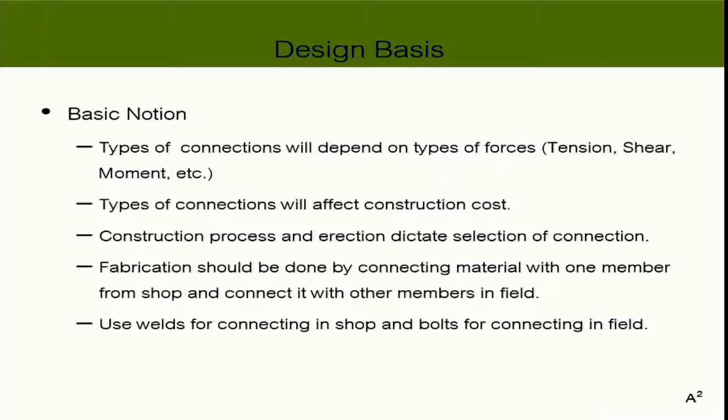The general idea is that you should always try to weld the piece of metal together in the fabrication shop alone, because that's where it is most safe, and you can control the quality. And in the field, you should only try to use bolts so that the erection process can go very quickly and safely.

But I have found this out: in construction in Thailand, if it is a small job, generally the contractor will not have the fabrication shop. Only the big companies will have that.

So the big companies can lay out a very good plan for fabrication. They could just prepare everything in their own yard, and then bring everything to the field and just connect it just like that. I have a good connection with a company down the road — you know that NL company.

It's a very good company, and they have their own fabrication shop, and they love the bolts very much because it makes everything fast, and they don't have to worry about the quality of the welding on site at all. But if the contractors are small companies, it's very hard for them to fabricate the piece of a structure and then have them shipped to the site.

I remember a few years ago, I did a small job for my friend, and I specifically said, okay, you need to weld this and this and this first, and then you just raise them up and bolt it together. One day I visited my friend's place, and I was shocked because the contractor would just bolt everything on the ground and lift everything and weld it in the air, just like that. From that day I understood they did not have the way to measure and prepare the members to very good detail.

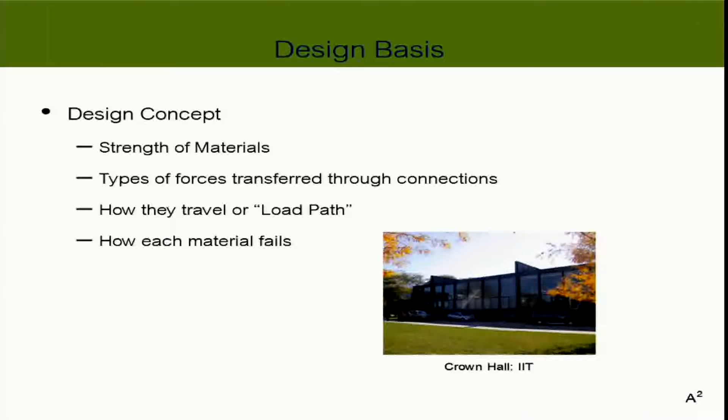He was the one who coined the phrase 'less is more,' I think. But that doesn't apply to everything, right? Because if we have less money, we don't have more money. So it's sort of a minimalist approach.

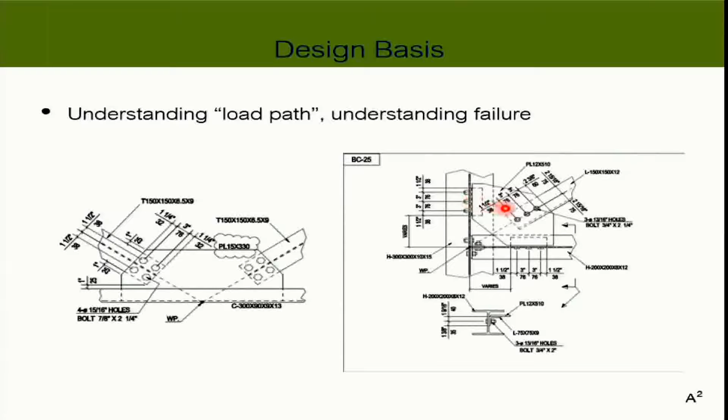This is pretty much the same idea of how the force is transferred, but when it arrives here, it's just going to go partially this side and partially that side, that's all. Okay, that is more of the same.

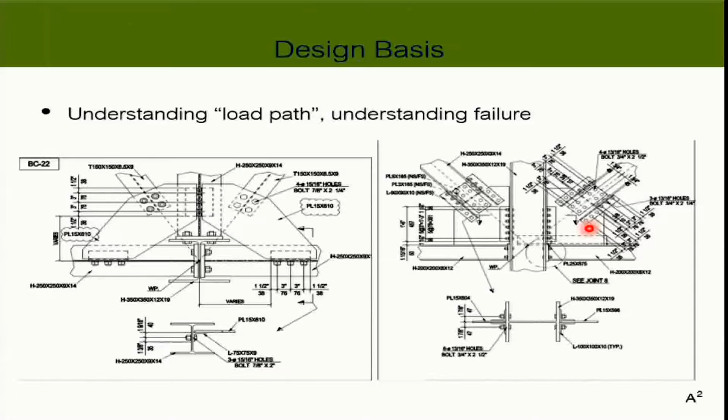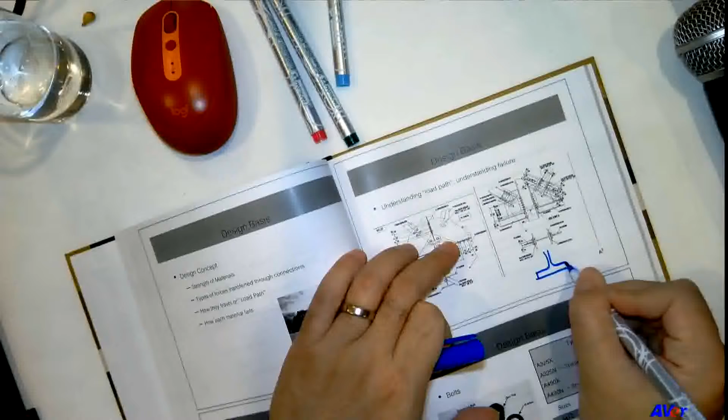So if it's gonna be too small, right? But anyway, let's try. Let's say this is the flange of our H—when you have the angle, it's gonna come like this, right? Oh, looks bigger.

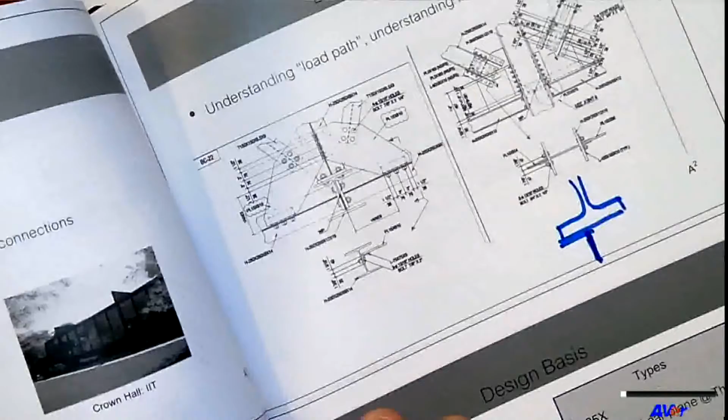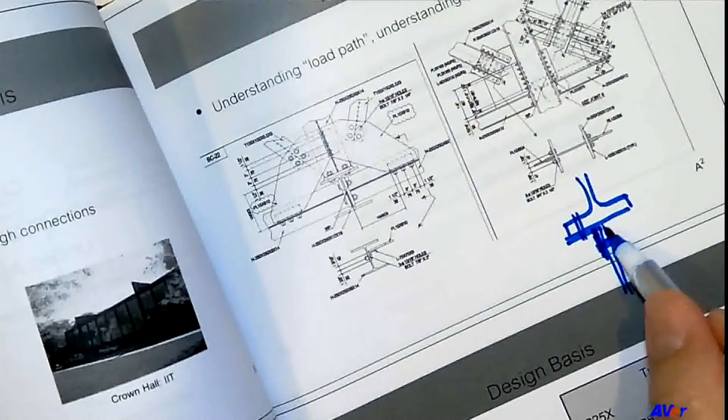So you can bolt the angle to the flange like this, and then the gusset plate is going to be here. So then you can bolt it on another side, and then you have another angle coming in here with the bolts. So we have two times the bolt on this side, but this bolt will have what we call double shear, so the capacity is pretty much the same. Well, I think this is beautiful.

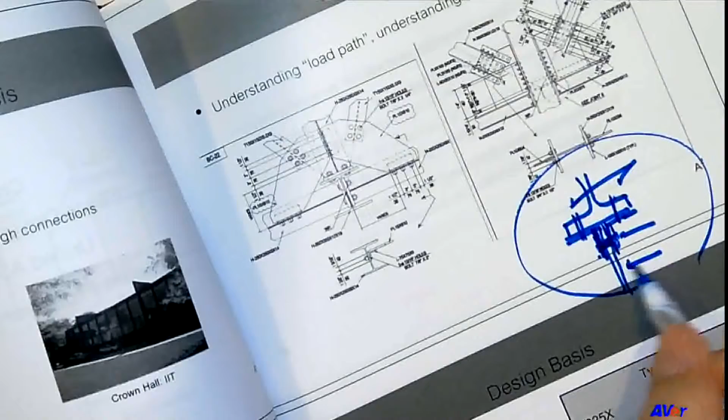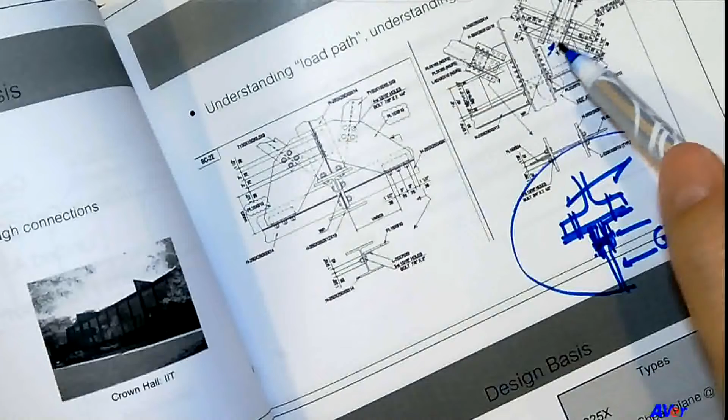This is how we utilize the angle. So this is the gusset, and they call this star bracing. If it's not enough, we can also add a plate here to help transfer the force from the web of the H shape as well. And remember, this H shape now we connect through both the flanges and the web, so the member itself will not have the problem with shear lag. So this is the perfect example.

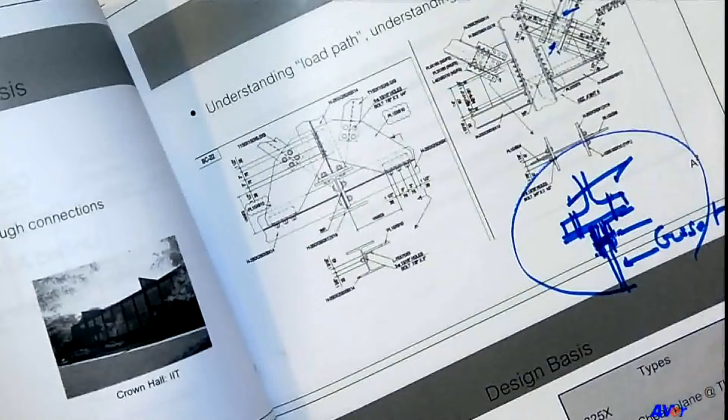If I don't have the plate at the web like this, we're gonna have to check the shear lag of this member, but for this detail, we don't have to. Okay, I think it's a bit too small, so I may stick to the piece of paper. So let's just come back to our academic side of things.

Now let's get to know the first material that we use to connect the steel members together. First is the bolt, of course, and generally there are more than two types. I think there's a third one available now, stronger than A490, but generally it's been used so far with two types, A325 and A490. The number indicates the strength associated with the bolt itself, so A490 is a bit stronger than A325.

There's a letter denoted at the back to indicate where the shear plane is, because the bolt has a thread. If the failure area is within the thread, that portion has smaller area - we lose something when we create the thread. So for the bolt under shear, if we shear off the bolt at the shank, the shank has more area than the thread. If the shear plane is at the shank, we get more shear strength from the bolt. But if the shear plane happens to be at the thread, we get less strength because of less area.

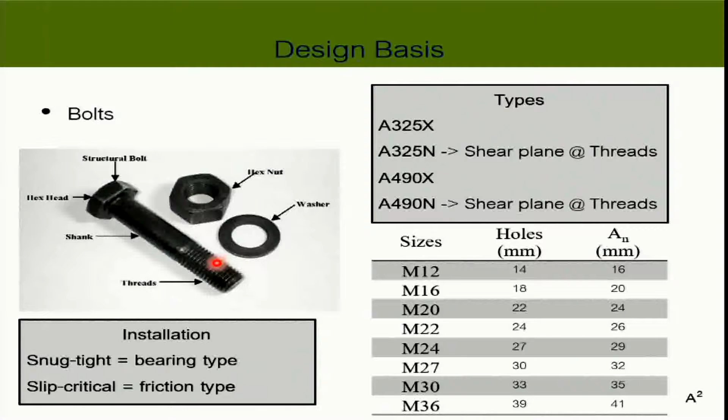We denote that at the end of the number using X and N. X stands for excluded - the thread is excluded from the shear plane, meaning the shear plane is at the shank, which is stronger. N stands for thread included, meaning the shear plane is somewhere at the thread. The N type would be weaker than the X type because the shear plane is at the thread, with less area.

Now the question is, can we actually locate where the thread of the bolt will be under construction? The answer is yes. If we check, we can acquire the dimension of the bolt before installation - how long the shank is, how long the thread is, and how thick our materials are, including all the plates, flanges and webs. If we really want to know, we can. But if we don't want to know, or cannot obtain information about other dimensions, I suggest going with the N type because it's safer. It's conservative, but it's the only option if we don't know where the thread actually is.

The next thing we should know is the size of the bolt itself. Generally this is in metric form, so the common types used in the market would be from M20 to M24. You can use smaller or bigger than that - I believe we have bolts bigger than M36. But if you're going to use an unusual bolt size, keep in mind you may need to order it from abroad, as it may be unavailable in the market.

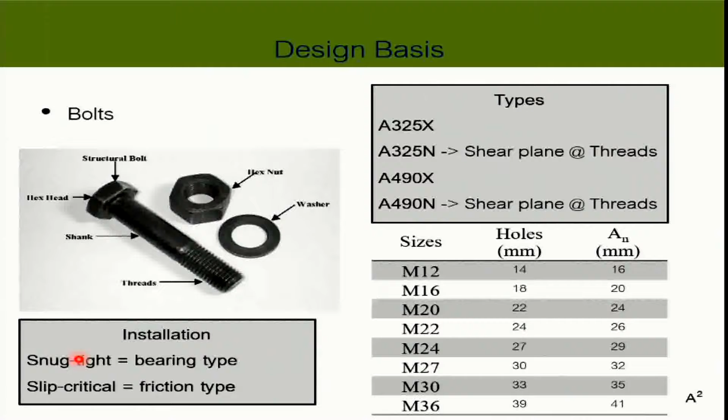So that's a typical one, and if we use that one, the force transfer mechanism involved is the bearing force. Remember bearing failure yesterday? If we install the bolt using snug tight, the force transfer will be via the mechanism of pressure between the bolt and the plate.

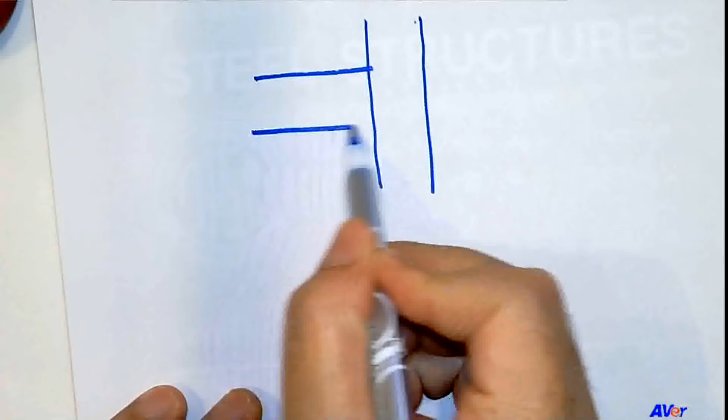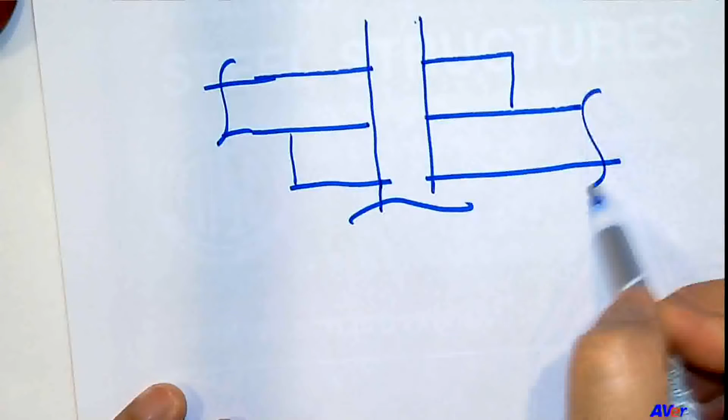So let's say this is my bolt, a bit crooked, and we have a plate here, like this. That becomes a bolt. And if I apply tension like this, if I pull this to the left, that means this area will come into contact, on the right, between the bolt and the plate. And we're going to have a pressure here. And the pressure like this is what we call the bearing force. And the force transfers because of the pressure between the contact surfaces, or the bearing force.

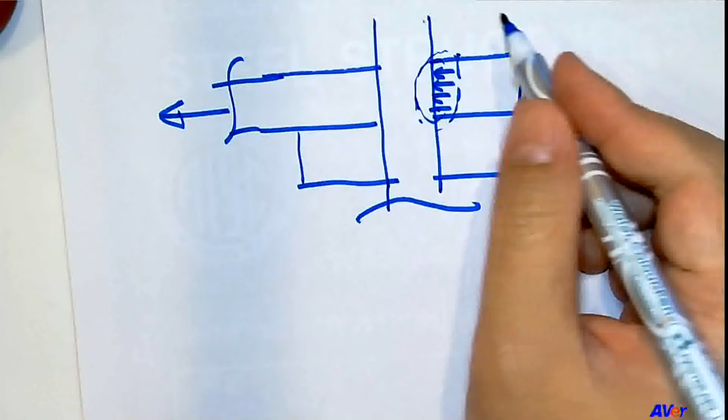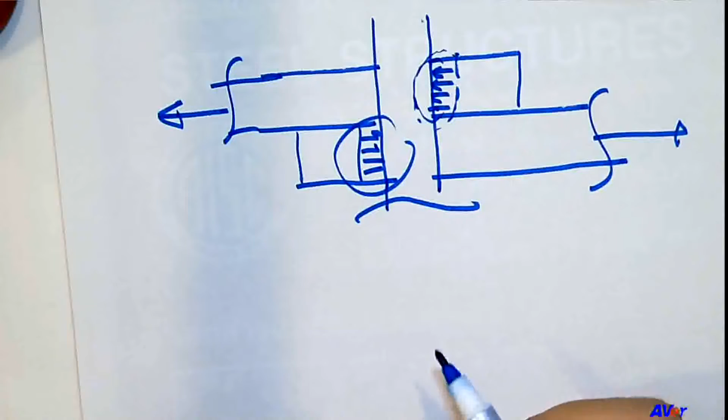And for this piece, it's going to be on this side, correct? So that's a bearing force. That is why we call it bearing type connection. It doesn't mean that it's going to fail due to bearing or it bears something. This is the bolt, and when you look at this free body diagram, it means that your bolt is going to fail due to the shear force here.

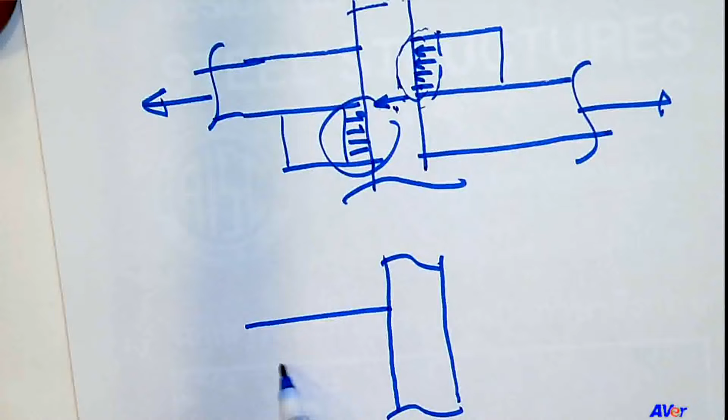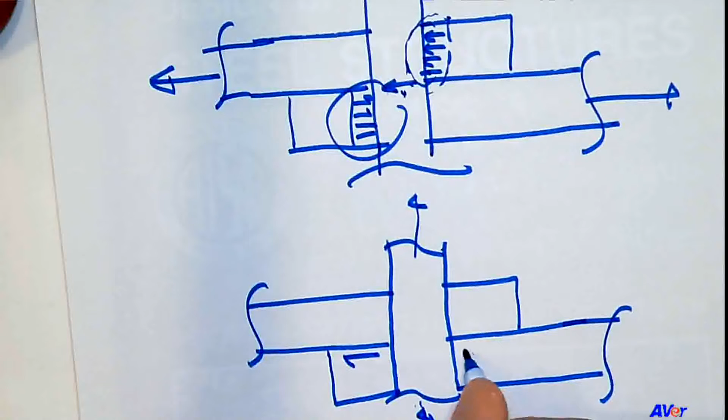Another one is the slip critical. As the name suggests, slip is critical, so we will not allow it to happen. So for that type of connection, we apply the pre-tension force. And when we apply the pre-tension force, and when it wants to squeeze back, it's just like the pre-stress concept, the pre-tension force will create friction between the surfaces, like this. So the slip critical type of installation will use the friction mechanism to transfer the force from this piece to that piece.

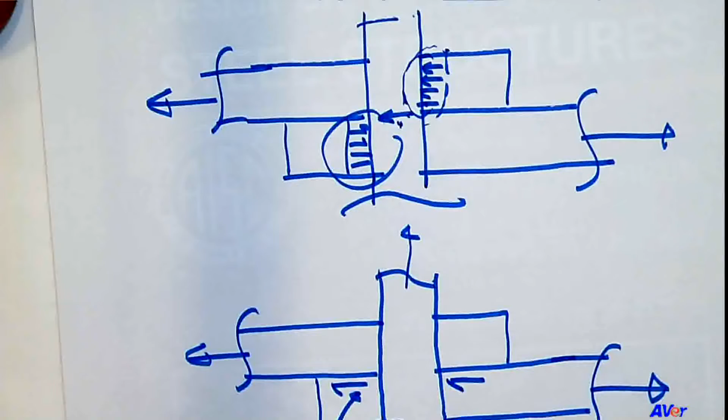The major difference is this. You see that, right? Yeah, I know how to do it. Zoom out a little bit. Okay, how about that? So for this, you can see that the mechanism for force transfer is bearing force or pressure. So that means deformation is inevitable. We're going to have deformation.

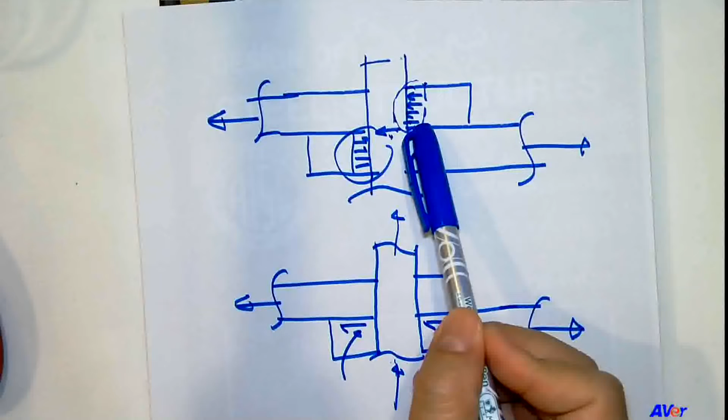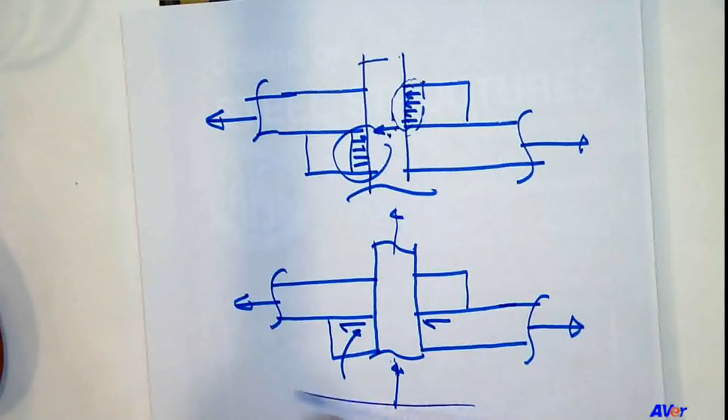And this, we hope not to have deformation, because if you have deformation, it would mean that your connection slips. And the name is slip critical—we don't want slip to occur. So we are going to use this type of detail when we need to control deformation.

So first, if you have a structure that will undergo cyclic loading conditions such as earthquake, you're going to have to use this detail. Or if you have a very tall building, AISC would suggest for buildings taller than 100 feet, so that means about 30 meters or so, if the building is taller than that, you're going to need this detail as well, because this bearing type connection will induce...

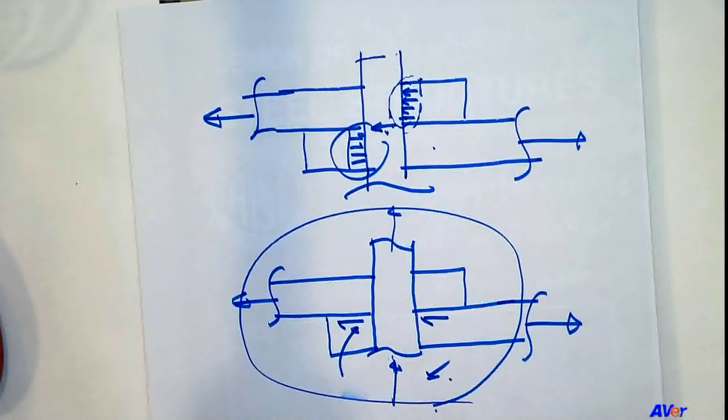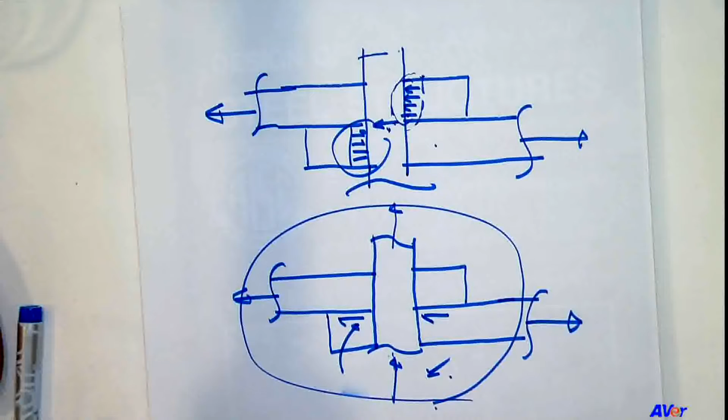Accumulate the deformation. So your building would start to have a lot of deformation due to bearing deformation coming from the holes. So if the building is too tall and you use this, you're going to have deformation from here, there, and everywhere. So in the end, it's going to be too much, and therefore they suggest this. But in general, for typical connection work, this is good enough.

All right, so we come back here. Is there any question? Now I already mentioned that.

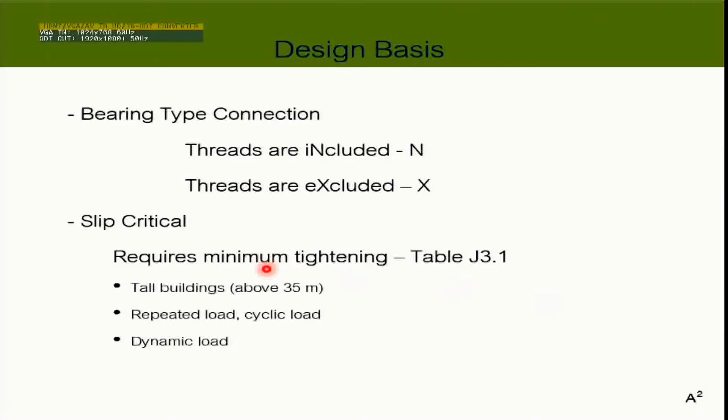Now, the next business is the bolt holes. Generally, we would have to deal with standard holes most of the time. Like I mentioned before, the size of the hole will basically equal the bolt diameter plus 2 millimeters if your bolts are not bigger than M22. If it is from M24 onward, the size of the hole would equal bolt diameter plus 3 millimeters. If you think this is too much trouble, you can just memorize plus 3 millimeters—1 millimeter will not kill anyone. And the oversized hole will be a little bit bigger, so it's 8 millimeters.

But if you use this, you cannot count that bolt in your bearing type connection, because your bolt hole will be too big and it will take very long before the bolt comes into contact with the plate or the flange or the walls. So the bearing mechanism will take very long to occur, so we cannot count that into our force transfer system.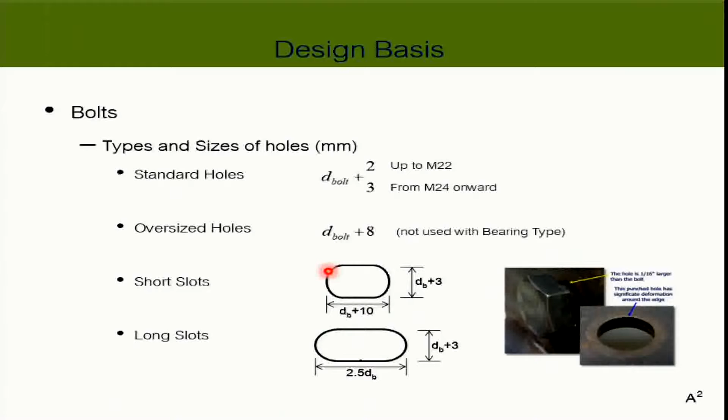And next is, of course, the spacing. Now, generally, what we need to worry about is the minimum spacing between each bolt, because that will involve the installation process directly. If the spacing is too small, that means you cannot fit the torque wrench between the two bolts, and somebody is going to press you very, very highly for that.

So we need to provide a space no less than 2 plus 2/3 of the bolt diameter. This is really the minimum requirement, but generally, who wants to calculate that complicated number? So we engineers generally use 3 times the bolt diameter.

And generally, let's say in the US, they generally use 3/4, 7/8 inch, and 1 inch bolt diameter. Those are the 3 popular sizes used in the US. So if the biggest size is 1 inch, they multiply that by 3, it becomes 3 inches. So the typical spacing used in the US becomes 3 inches. Generally, if you have the spacing, they would just stick with 3 inches.

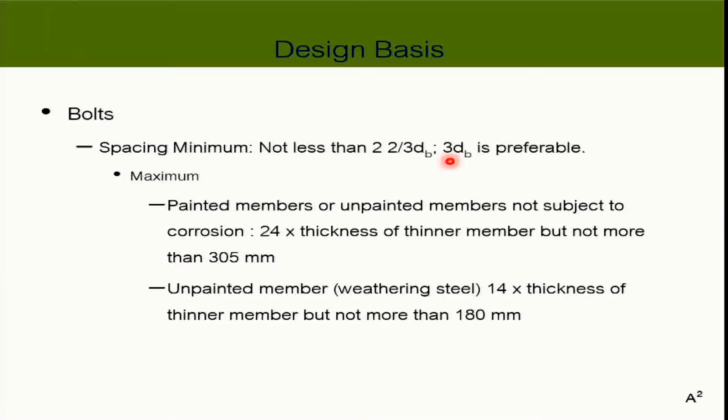But keep in mind that it would work for up to, if the bolt size becomes too big, 1 inch, 3 inches will not work as well. Now, for our business in Thailand, we don't have that many. But I hope, who knows in the future, because if the labor cost keeps increasing, one day trying to build everything on concrete may not be very profitable anymore. So if we use steel that much, we may have the typical spacing that is generally used amongst engineers.

But right now, I sort of myself use maybe M20, 22, 24, that sort of thing. So if you multiply 3 to 24, it's 7 centimeters something. It's a bit annoying, so I myself would go for 8 centimeters as my preference. But again, you can just use any numbers you are comfortable with, as long as it meets the minimum requirement.

And the maximum size is concerned with the corrosion and painting, but they say you don't have to use more than 30 centimeters spacing. So we're talking about a foot here. I don't think that should be any concern for us at all. Just make sure that you provide enough minimum spacing for installation. That will be fine.

Now, with all those gimmicks aside, it's time to talk about the strength now. So generally, the bolts can carry tension and shear. So let's start with tension first.

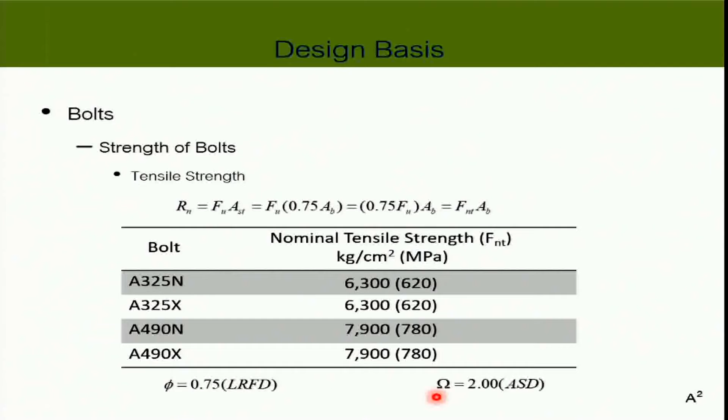Now the shear. Again, when we talk about the shear, it means that we need to convert our tensile strength into shear strength by von Mises criteria. I don't know why they use 0.625, but let's say it's 0.6. I got this number from the bolt design guide or the commentary of AISC. It's been a long time.

So that's one, to change the ultimate tensile into shear. And then we have that, 0.9. It's called the bolt group factor. We need to have this bolt group factor because they are still a little bit afraid that if you have a lot of bolts and then you apply the shear force to them, how can you be sure that every bolt will carry the same amount of force? It's not possible, actually.

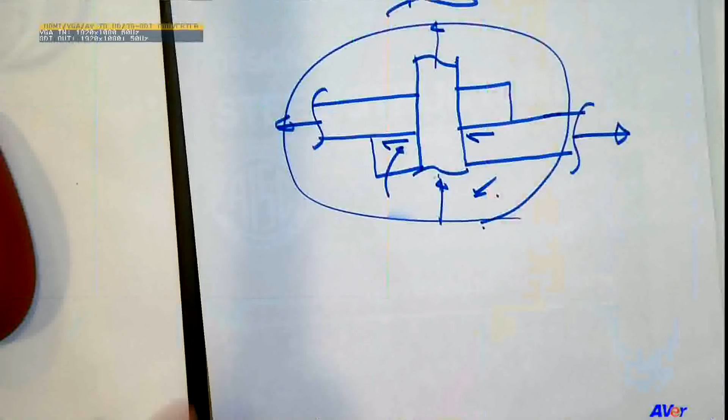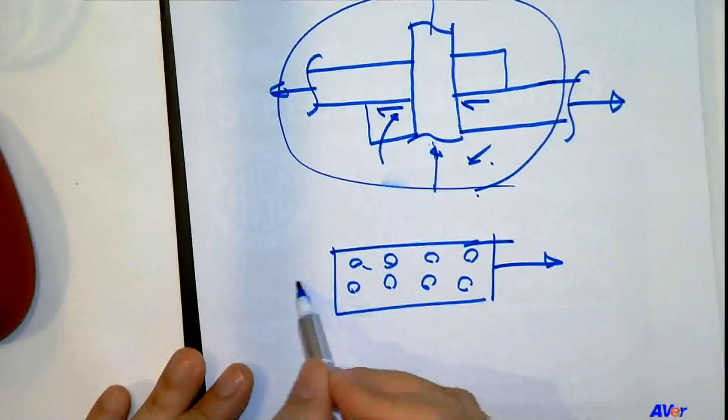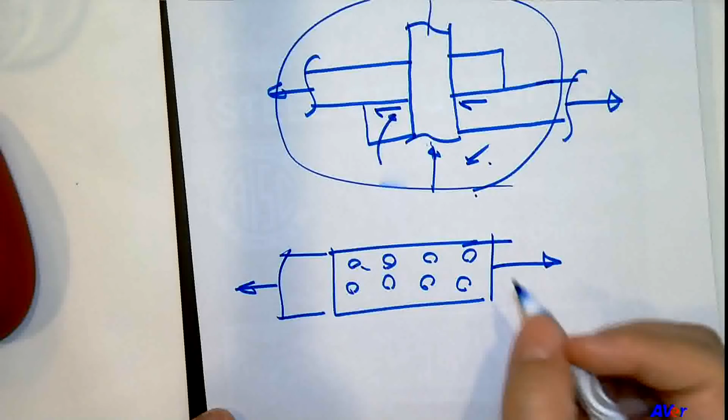Let's say if I have a connection that looks like this, and then I apply tension like that. If I apply tension in this direction, that means the bolts will have to carry the shear force, right? And how can you be so sure that this bolt will carry the same amount of force as that one? Naturally, it's not possible. The ones up front will have to take more, right?

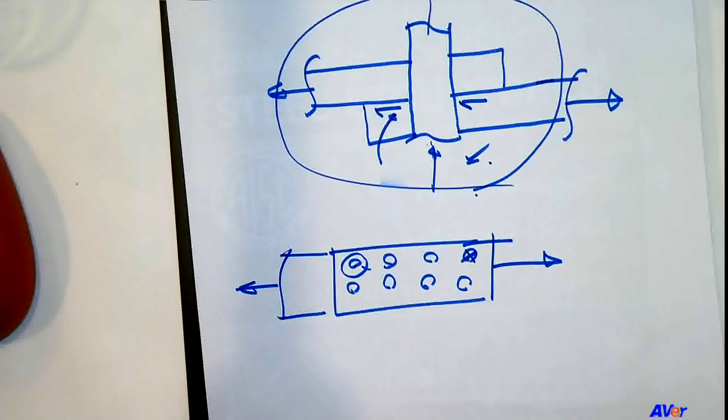But when we design, we will just take the force and divide by the number of bolts, because there's no other practical way to do it. And we could do that because the bolt group factor has been included in our design already, that 0.9.

So after multiplying the ultimate tensile strength with this von Mises factor and with 0.9, we have this as the nominal shear strength of the bolt. But this is for thread excluded, or X type. If we have N type, it means that we also need to reduce the cross-sectional area of the bolt. So therefore, if you have the N type, you take this number and multiply further by 0.8.

So you have this number for the N type. And after all the hullabaloo, we have the numbers that you can use right away as the nominal shear strength of the bolt. You multiply this with the area, and you have the nominal shear strength of one bolt in terms of force. But don't forget that we need the phi and factor of safety after that as well.

One more side note here: if you have a very, very long connection, you need to reduce the value by 0.833 further, because long time ago, the bolt group factor used to be 0.75. Now they increase it of late, but still, if it's too long, it's still not so sure about the strength. So you need to further reduce it if your connection is longer than, say, 1 meter.

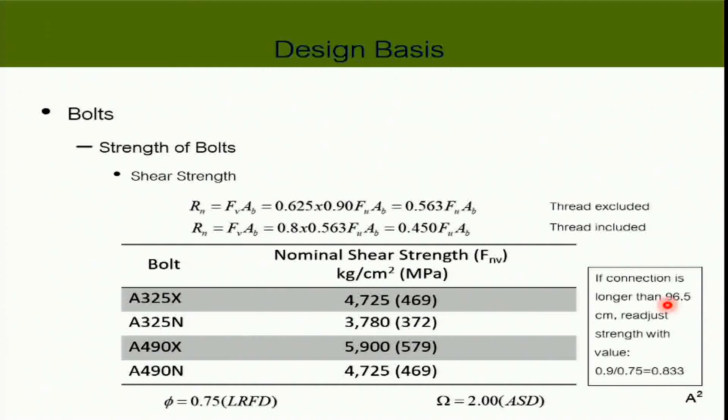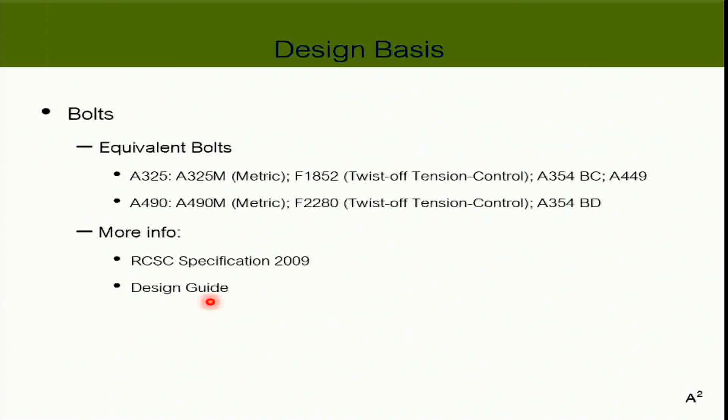Okay, all right. So far, so good, right? The bolt is so straightforward. And if you look at the specification, they will tell you that the design of the bolt can be done by just using one formula.